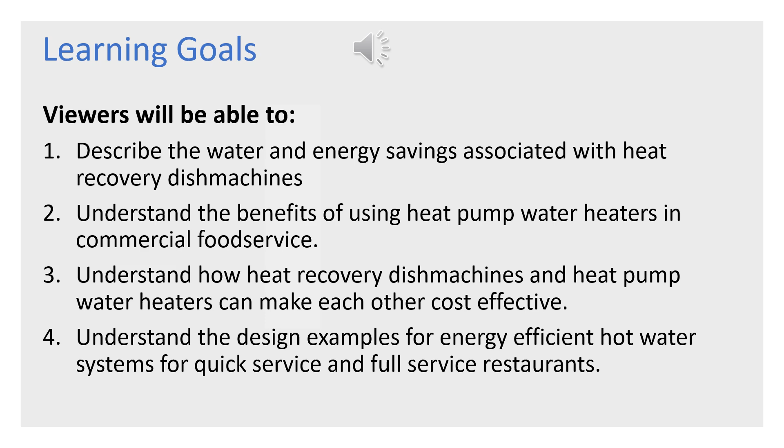By the end of this presentation, viewers will be able to describe the water and energy savings associated with heat recovery dish machines, understand the benefits of using heat pump water heaters in commercial food service, understand how heat recovery dish machines and heat pump water heaters can make each other cost effective, and understand the design examples for energy efficient hot water systems for quick service and full service restaurants.

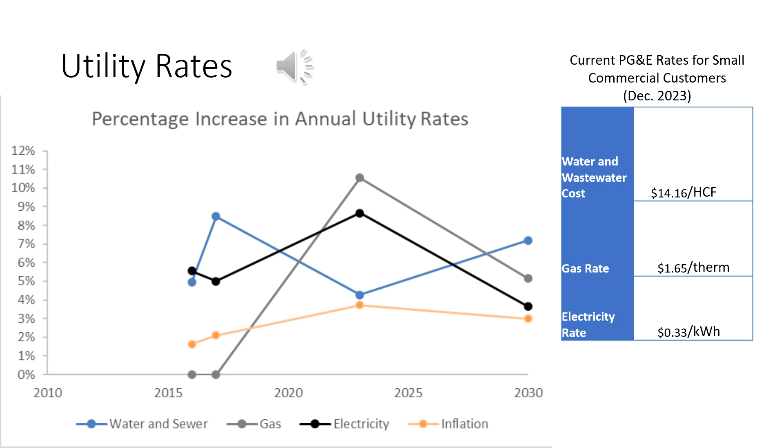Generally speaking, utility rates are rising and are rising a bit faster than inflation, and they're projected to continue rising a little bit faster than inflation throughout the rest of the decade. Electricity and gas rates have been going up as a general trend over the last 10 to 15 years, and electricity is set to actually outpace gas in terms of how much it's going to increase. This is going to make fuel switching from gas to electricity a little bit more difficult financially going forward, but later in this presentation we'll show that it still can be cost effective in some cases.

Hot water systems are divided into three main parts: hot water delivery and fixtures, distribution systems, and hot water generation. In section 1 of this presentation, we will discuss hot water delivery, points of use, and fixtures, including dish machines, pre-rinse spray valves, other pre-rinse operation equipment, hand sinks, and lavatory sinks.

Section 2 will cover distribution systems, which is the set of piping that connects water heaters to fixtures. This will include hot water piping, insulation, and recirculation systems and their control systems.

Section 3 will cover hot water generation, which will talk about different kinds of water heaters and their various efficiencies, and different schemes to increase the overall operating efficiency of these water heaters. Finally, Section 4 will cover design examples in a quick service and a full service restaurant that will bring all of this information together.

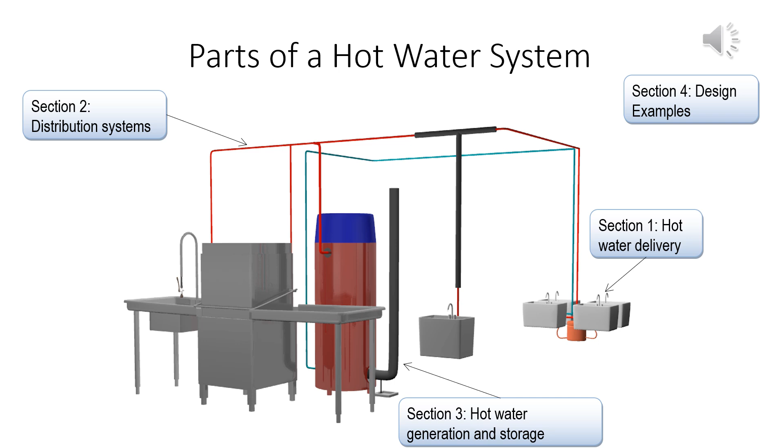This is largely due to differences in these systems. Quick service restaurants typically will have much smaller systems than full service restaurants, and full service restaurants will typically need to use larger and a larger number of dish machines than a quick service restaurant would. Full service restaurants typically rely more on in-person dining and reusable dishes rather than quick service restaurants, which can rely more on takeout, which is a large part of the reason that the water use between these two types of facilities are so different.

This has consequences for their overall energy use and their annual utility costs. The natural gas used for a quick service restaurant is about 1,600 therms per year, whereas a full service restaurant will use about 8,400 therms per year. It is assumed for these restaurants that they're using standard efficiency tank type natural gas fed water heaters, because these are the most common type of water heater found in the commercial food service industry at the time of this recording. A full service restaurant will also use about 74,000 kilowatt hours per year to feed its dish machine and its recirculation pump.

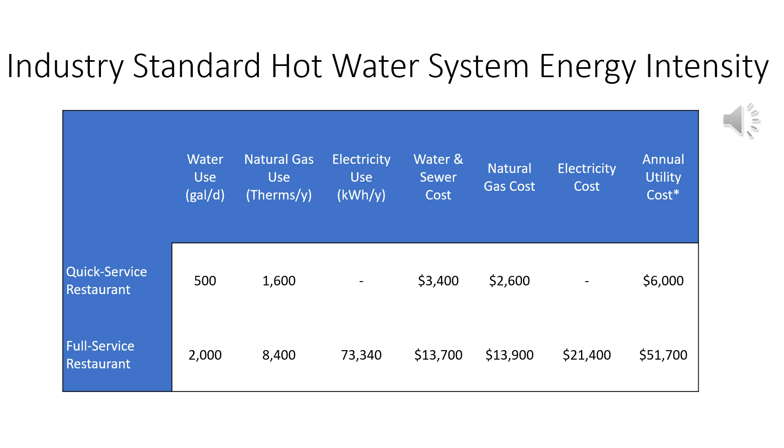The savings potential for hot water systems in quick service and full service restaurants is pretty substantial. A best-in-class quick service restaurant will use a high-efficiency gas-type water heater, as well as high-efficient fixtures such as a high-efficiency pre-rinse spray valve and low-flow aerators. A best-in-class full-service restaurant will use efficient fixtures and will use a heat recovery dish machine, which will lower the load on its upgraded efficiency water heater.

These changes lead to annual savings over conventional of about $1,600 per year for the quick service restaurant and about $11,000 a year for the full service restaurant. These savings are pretty substantial and can help to justify the cost of replacing equipment even in the middle of its service life.

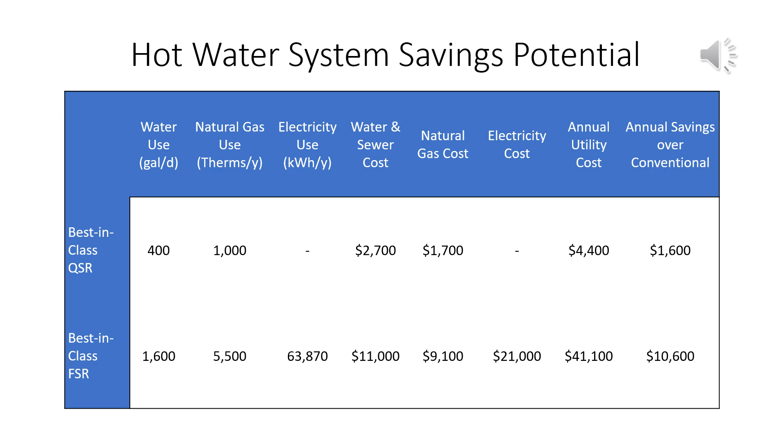The design path for savings will help designers engineer systems that can achieve the savings potentials listed on the previous slide. The first step is to specify efficient hot water equipment. This step will lower the total amount of hot water demand, which will have many design implications as designers move from the fixture all the way back to the water heater.

The next step is to build an efficient distribution system and to optimize the control of the recirculation loop. This will further reduce the energy demand on the water heater. Once these are achieved, the designer should specify a high-efficiency water heater. There are multiple examples of high-efficiency water heaters listed later in this presentation and in the design guide.

The last step is to commission and develop a maintenance and equipment replacement plan. Once the system is actually designed, it is imperative to commission the system as it is actually designed and then to maintain that system so that it operates as the designer intended it to. It is also important to have an equipment replacement plan so that the operator can make good decisions about what to do when pieces of equipment invariably burn out.

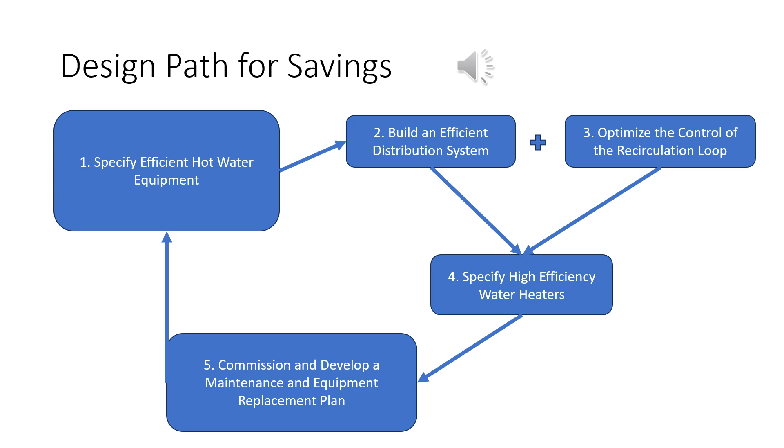Section 1. Fixtures and dish machines.

Specifying efficient fixtures is an important design step for many reasons. The first is that efficient fixtures limit the hot water demand, which reduces both water and energy consumption. The second, and most important from a design perspective, is that reducing hot water demand affects every other part of the system.

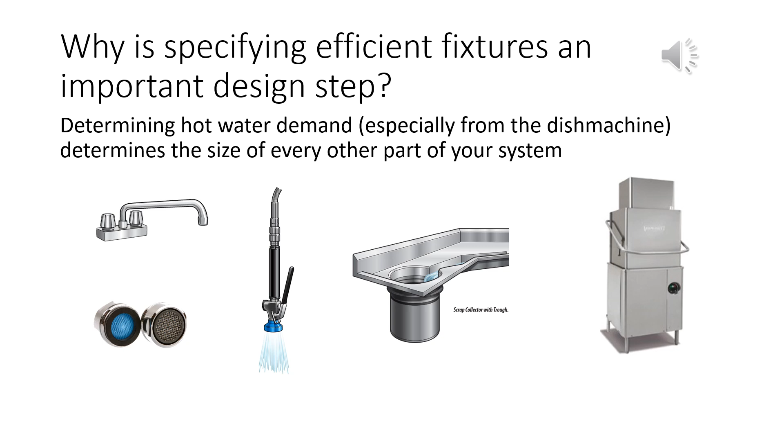Pipe diameters, both for branches and for the main recirculation loop, can be smaller if low water use fixtures are used. Hot water demand also plays a role in sizing the water heater. A system with efficient fixtures can have a smaller water heater, which can help reduce the first cost of the system.

Most of the hot water demand in a commercial kitchen comes from the dish room because this is where most of the critical sanitation tasks happen.

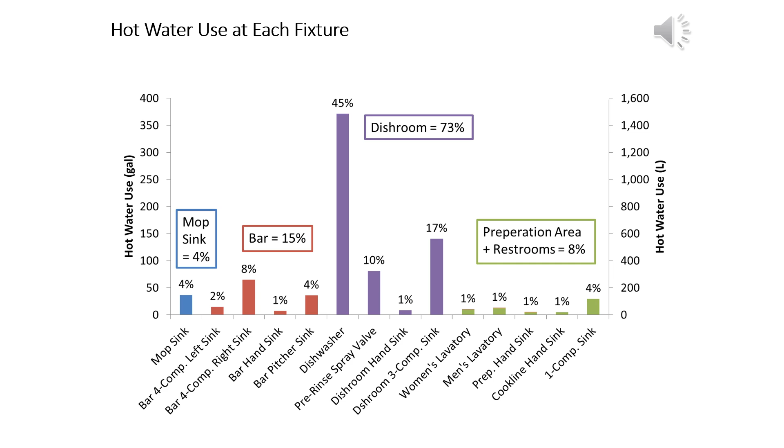The dish machine is typically the most hot water intensive fixture on a hot water system, so selecting an efficient dish machine is one of the most important tasks for hot water system design.

There are 4 main classes of dish machine commonly found in commercial food service facilities. Larger facilities typically require larger dish machines as they can wash larger volumes of dishes.

The smallest dish machine is an under-counter machine, typically found at bars and cafes. They are also found in front-of-house bars in larger full-service restaurants. Under-counter dish machines are by far the most common type of dish machine.

Upright door-type machines can wash between 45 and 60 racks of dishes per hour and are commonly the main sanitation workhorse of a full-service restaurant.

Rack conveyor dish machines use a conveyor to feed racks of dishes through the washing chamber and can wash up to 90 racks of dishes per hour. They are commonly found in very large full-service restaurants and cafeterias.

The largest class of dish machine is a flight-type machine, named for its use in airport commissaries. They use a conveyor with plastic fingers to feed dishes through the washing cavity and are commonly found in large institutional facilities such as university and prison cafeterias.

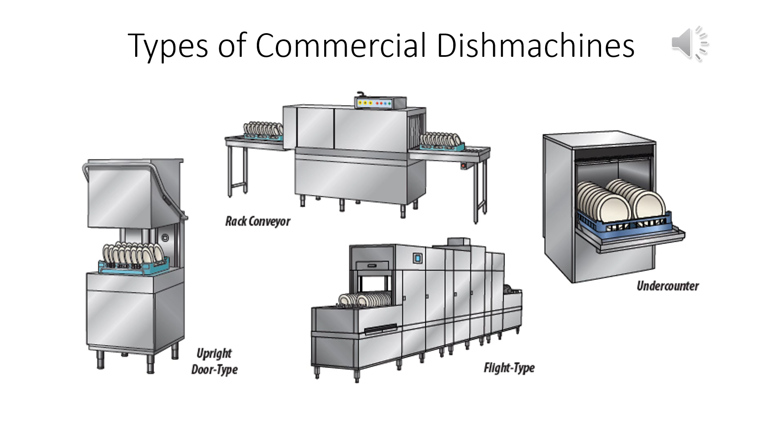To size a dish machine, a designer needs to know the estimated dish throughput of the facility. A common design misstep is using an oversized dish machine for the actual load. This can cause lower system efficiency and water and energy waste.

Under-counter dish machines typically have water uses rated between 0.6 and 0.8 gallons per rack of dishes washed. In the field, they're typically found to consume between 0.7 and 2.5 gallons per rack. This is a common feature among dish machines, that they'll use more water in the field than the manufacturer's rating.

This is usually due to maintenance concerns, as most dish machines tend to use more water as they age in the field over time. Door types are usually rated between 0.6 gallons per rack and 1.0 gallons per rack. In the field, they're usually found to consume between 0.75 gallons per rack and 1.4 gallons per rack.

It also compares the manufacturer's rating to the real world as-measured energy and water usage for rack conveyor and flight type conveyor dish machines. These machines typically use much more water than their door type or under counter counterparts.

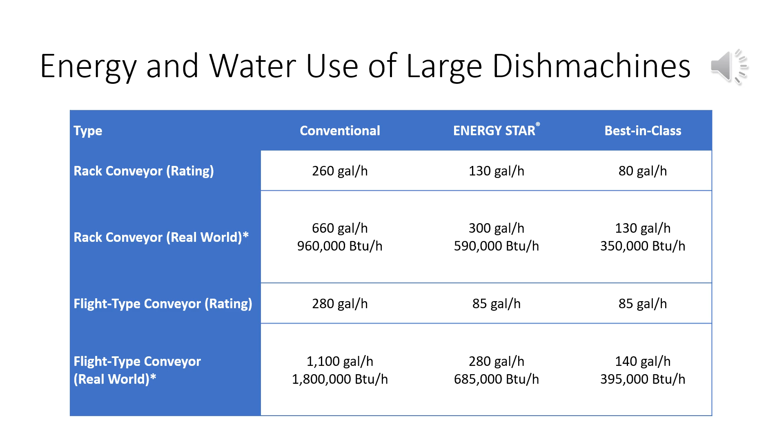One of the most important emerging technologies for efficient dish room design is the exhaust heat recovery dish machine. These machines use a heat exchanger to capture the heat generated by the dishwashing process, which is normally lost when the waste steam goes through the exhaust hood.

The energy from this steam preheats incoming cold water. The preheated water is then sent through a booster heater to reach its final rinse temperature. Door type and under counter heat recovery dish machines can preheat incoming cold water to between 110 and 130 degrees before reaching the booster heater.

They have been shown to use the same amount of electricity as their conventional high-temperature dish machine counterparts in the field. However, heat recovery dish machines consume far less hot water. Some don't even have a hot water connection.

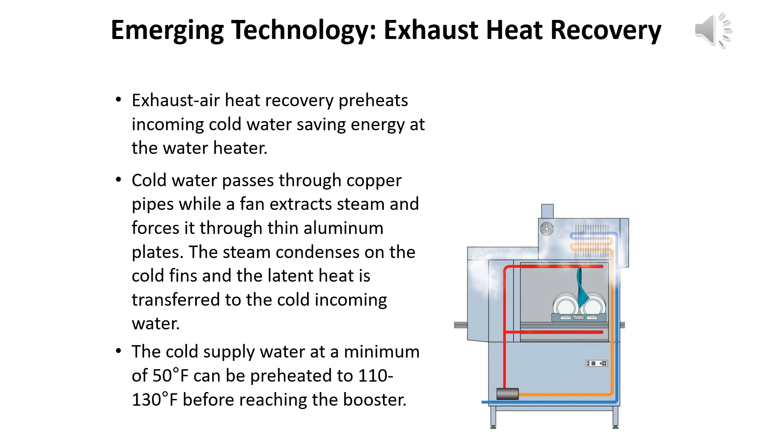They therefore present sizable hot water and energy savings at the water heater. They have also been shown to project less heat to the dish room space, saving air conditioning money and contributing to a more thermally comfortable working environment. They also require less or no ventilation, saving energy at the exhaust fan. This is an important point for HVAC designers because in some cases, dish rooms can be designed without an exhaust fan altogether when using an exhaust heat recovery ventless dish machine.

The baseline machine used about $23,000 per year between its water and electricity costs and the gas consumption of the water heater. The exhaust air heat recovery machine saved about $7,000 per year even though it washed the same number of dishes per day. The heat recovery machine used roughly the same electricity as the baseline machine, so its savings were attributable to its much lower water usage and the fact that it didn't consume gas because it didn't have a hot water connection.

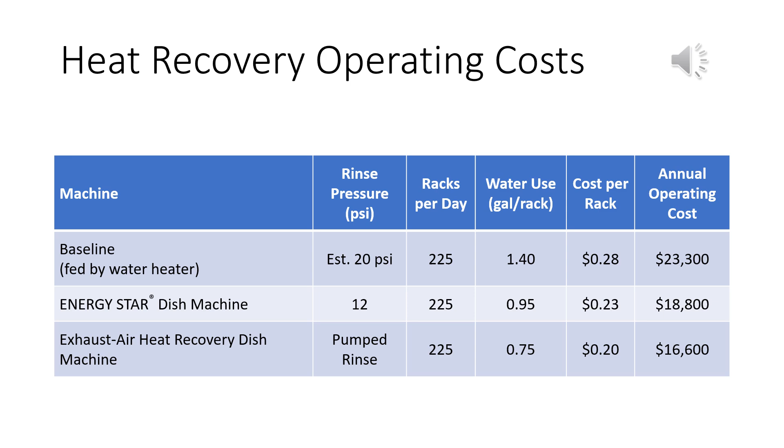Many manufacturers produce an exhaust air heat recovery dish machine and sell them in the US. Many manufacturers also make cold water feed only machines available in door-type and under-counter models.

If the hot water demand is smaller through the use of efficient fixtures and heat recovery dish machines, pipe diameters can also be smaller. This helps save energy everywhere in the distribution system because there is less pipe surface area for heat loss. It also improves overall hot water delivery performance.

3/8 inch piping would allow for lower wait times for hand sinks, but due to outdated sizing guidelines that don't take half GPM hand sinks into account, this is not currently allowed. The common practice is to feed hand sinks with 3/4 inch diameter piping, but this means branches to hand sinks need to be less than 2 feet long to preserve 10-second wait times.

Now that the hot water load has been minimized by selecting efficient fixtures, a more efficient distribution system can be designed. Section 2: Distribution Systems.

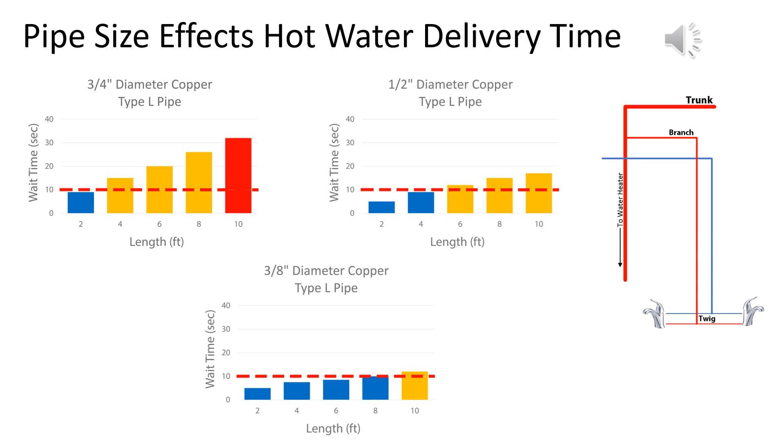The distribution system design best practices listed here are all designed to reduce the total amount of hot water distribution system piping. This will reduce energy waste through the distribution system. Mirroring men's and women's restrooms is an obvious place to start because it will reduce the number of branches coming off of the main recirculation loop. Locating the dish room on a wall opposite the front of house and placing any auxiliary bar fixtures or restrooms on the other side of the dish room wall is another way to reduce the total amount of piping.

Centrally locating the utility room and locating it near major points of use is a good rule of thumb. Locating all of the fixtures close to each other will reduce the number of branches that you need to have off of the main recirculation loop.

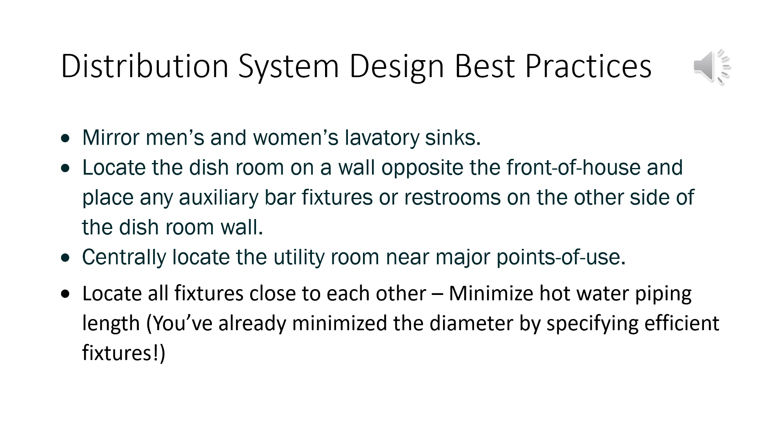There are two types of conventional distribution systems commonly found in commercial food service facilities. The first is the simple distribution system, which connects a main hot water trunk to the water heater, then branches off to each fixture. The main benefit of this system is that it's easy to design and install, but the main drawback is that there are usually significant delivery problems, especially long wait times at hand sinks.

California building codes state that if there are fixtures located more than 60 feet away from the mechanical room, simple distribution systems are not allowed. They are therefore usually found in quick service and very small full-service restaurants.

One common configuration is to run two distribution lines: a 140-degree sanitation line and a 100 to 120-degree hand sink line. This greatly increases energy waste because of all the extra piping.

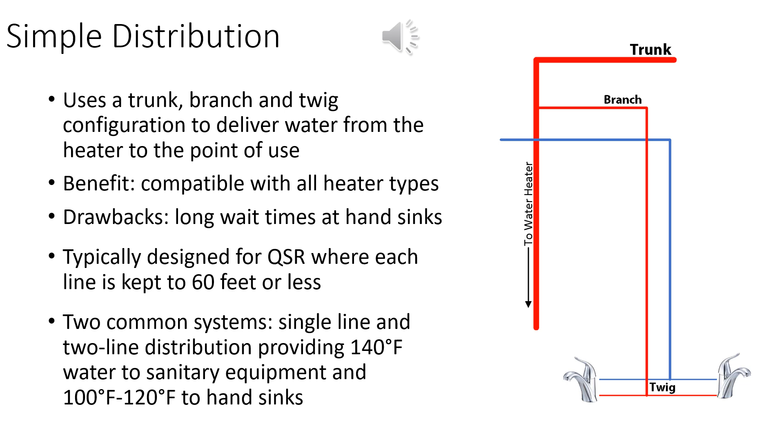The other type of conventional distribution is a continuous recirculation system, which uses a pump to keep a recirculation loop near the water heater's set point temperature. This improves hot water delivery because instead of having to draw water through the whole system, each fixture only has to clear the water in its branch before it sees hot water.

This method does not always ensure that hot water makes it to the faucet. Hand sinks still have delivery problems with continuous recirculation systems. High operating costs are incurred in a typical full-service restaurant because hot sanitation water circulates all the time, constantly losing heat to the surroundings.

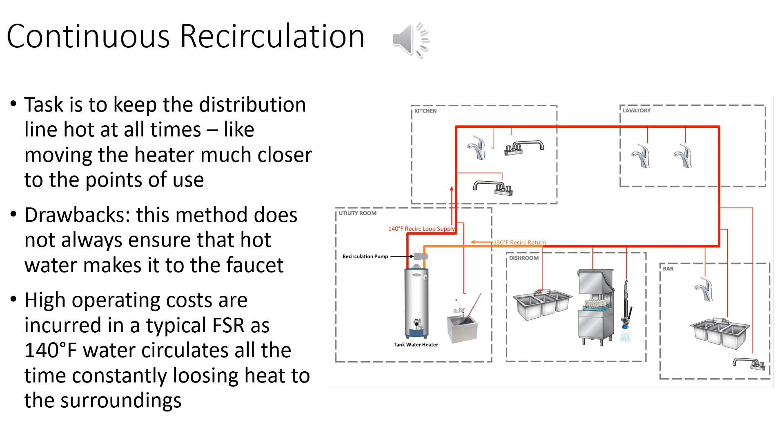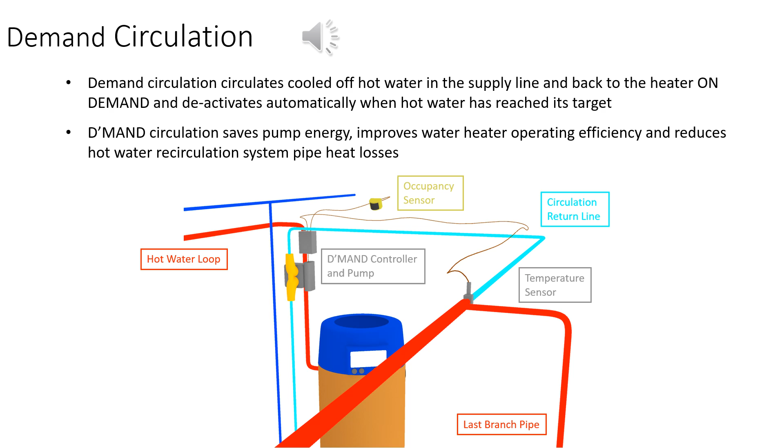One method for reducing the energy waste from continuous recirculation systems is to install a demand circulation controller. These controllers use occupancy sensors, temperature sensors, and timers to ensure that the recirculation pump only runs when hot water is needed. They can reduce the pump runtime from 24 hours per day to less than 2. This reduces recirculation system pipe heat losses, saves pump energy, and improves water heater operating efficiency. It is especially effective for systems that use a condensing water heater because they can help preserve tank temperature stratification.

An emerging distribution strategy is distributed generation. These systems use a main recirculation loop to feed the fixtures close to the mechanical room and use small point-of-use heaters to feed hot water to fixtures that are far away. These point-of-use fixtures are usually electric so that they don't need to be vented. This greatly reduces the amount of hot water piping.

In the example shown on this slide, a heat recovery dish machine is also used, which means that the main recirculation loop can run at a lower temperature than 140 degrees, thus saving additional energy on the main loop.

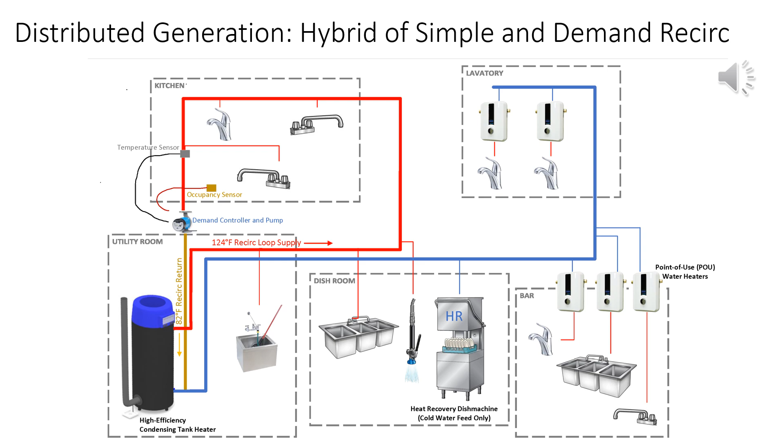Pipe insulation is an obvious and easy energy-saving technology for hot water systems. Designers should specify insulation on all hot water supply, return, and branch lines to make sure that the minimum amount of energy is lost from the piping system to the ambient surroundings.

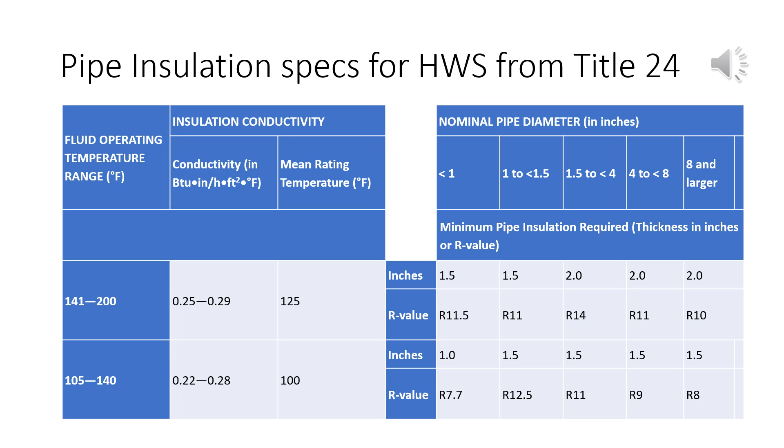In addition to being a very effective energy-saving technology, pipe insulation is actually called out for hot water systems in California's Title 24. This table shows the insulation conductivity and the minimum pipe insulation required per nominal pipe diameter for different temperatures of fluids.

Pipe insulation is commonly specified for hot water systems, but in practice, it is often poorly installed if it is installed at all. Pipe insulation should be installed on the cold water pipe leading to the expansion tank, as well as on all of the other hot water piping.

Pipe supports should be installed on the outsides of pipes because if installed on the pipe's surface, they can act as thermal bridges or fins which can rapidly bleed heat to their surroundings. Tees and turns are also commonly uninsulated, but can be easily insulated according to the schematic at the bottom left of this slide, which shows how to create a notched tee and a mitered elbow.

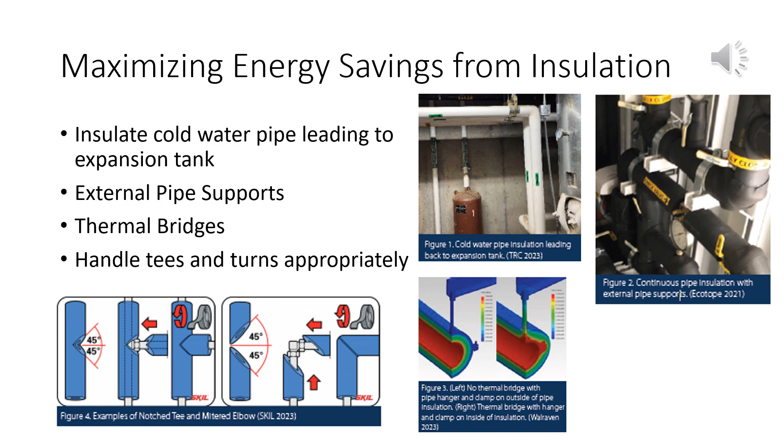Master mixing valves can increase the effective hot water storage capacity because they allow for the water heater to operate at temperatures much higher than the desired system set point. The MMV tempers this overheated water with cold water to produce the desired set point temperature in the supply loop. This is very important for water heater sizing, especially for heat pump water heaters, which typically have slow recovery rates and depend on storage volume to provide adequate performance.

Running the water heater at a higher temperature can improve tank stratification when used with a master mixing valve. Instead of allowing 100% of the recirculating water to return to the tank, the master mixing valve only allows 10 to 30% of the water to return to the water heater. The balance is made up with cold water. So, the MMV allows for higher temperatures at the top of the tank and lower temperatures at the bottom of the tank, thus improving stratification.

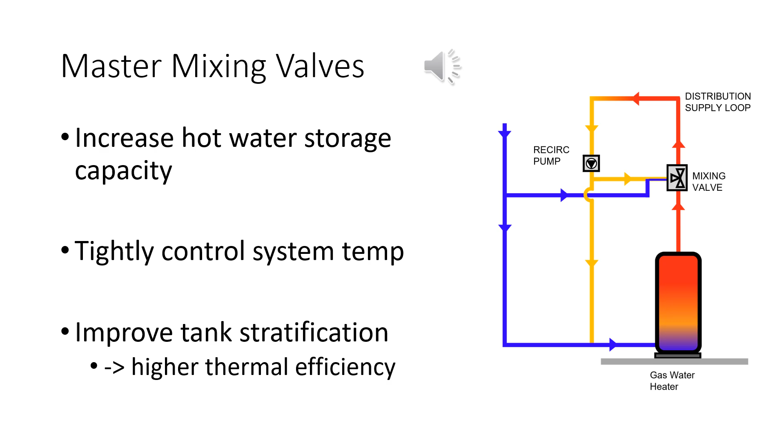Master mixing valves can also tightly control the distribution system temperature. Modern MMVs have digital controllers in dead bands around 3 degrees Fahrenheit.

Recirculation pumps are a significant electrical load on the water heating system. They are typically oversized, which means both that there's typically too high of a flow rate of water running through the recirculation pump, and that there's too much energy being consumed by the pump itself.

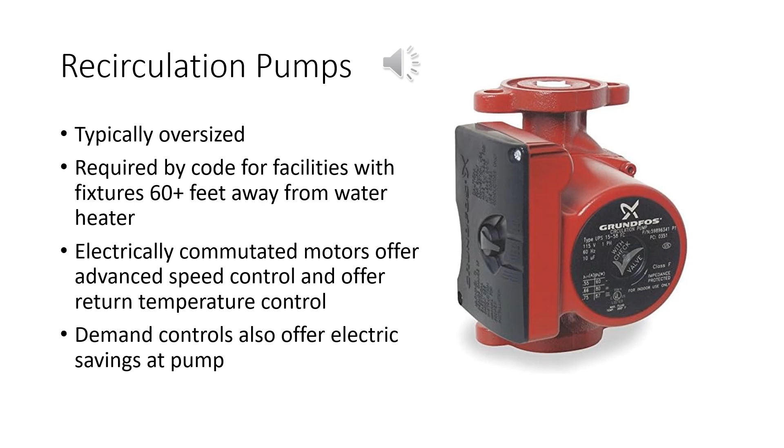Electrically commutated motors offer advanced speed control and return temperature control, which allows for less electrical energy to be consumed. Demand controls offer electric savings at the pump, basically by turning the pump off when it doesn't need to be run.

ECM pumps are more efficient and use less electricity than conventional recirculation pumps. They can run at variable speeds, which means they are more controllable. ECM pumps are also more expensive at first cost, but don't break down as often as recirculation pumps.

Overall, they can be less expensive to operate over time because they use less electricity and don't need to be replaced as often.

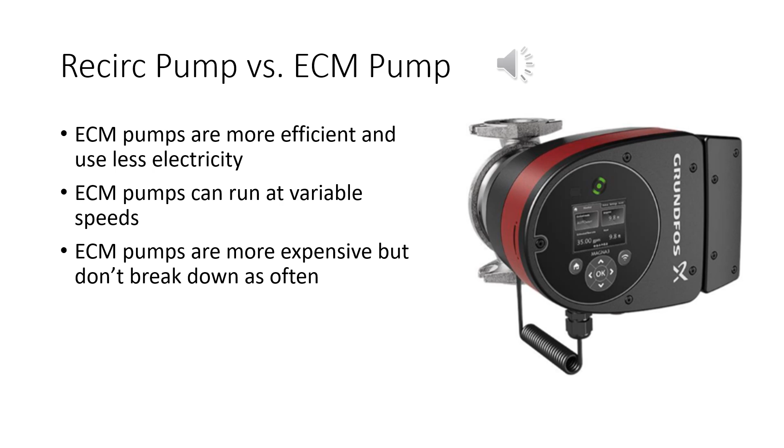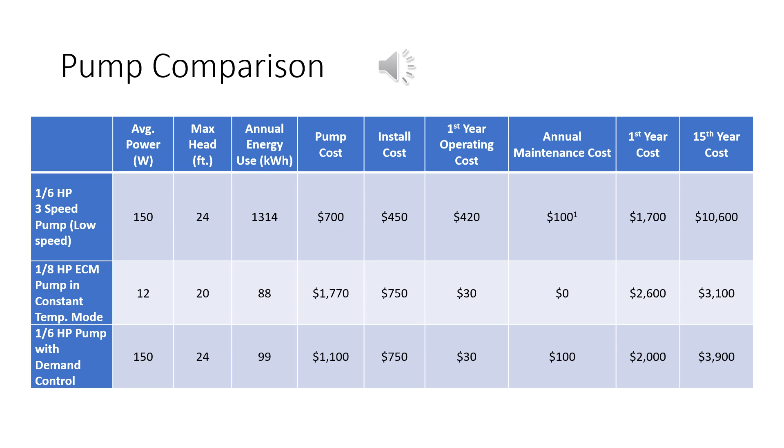In the annual maintenance cost column, it is assumed that the conventional pump uses $100 in maintenance costs per year. All of this leads to the last column, the 15-year cost, being $10,000 for the uncontrolled conventional pump, $3,000 for the ECM pump controlled by a constant temperature controller, and $3,900 for the conventional pump controlled with a demand controller. The clear winner is the ECM pump in constant temperature mode because it is less costly to run over time than the conventional pump, even when controlled with a demand controller.

Section 3. Water heaters.

The first step in selecting a water heater for a commercial food service facility, once the rest of the system is designed, is to select the kind of water heater that is desired.

The most common water heater type is the standard efficiency natural gas fed storage water heater. The pros are that these heaters are very simple, robust, low cost, easy to specify, easy to fix, easy to replace, and relatively cheap, with an upfront cost of between $2,000 and $9,000 depending on the size of the heater and how much storage it has.

The cons are that it only has an 80% thermal efficiency. They can have significant standby losses. They can run out of hot water, especially if undersized, and they have a short lifespan in commercial kitchen environments, around 5 years.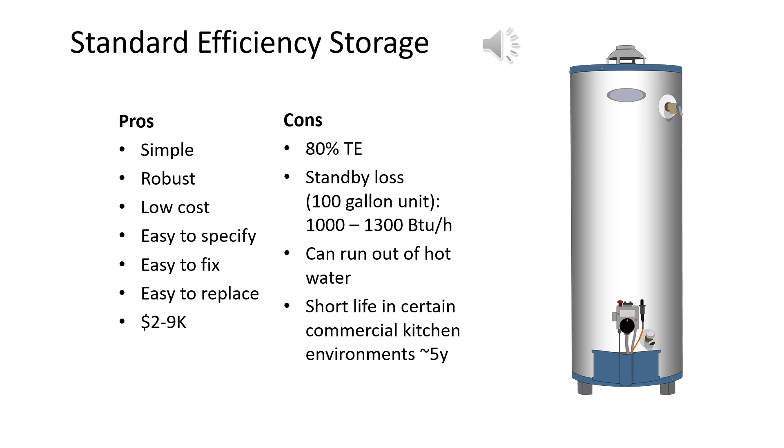Condensing water heaters are more efficient than standard storage water heaters. They work by running extra lengths of exhaust through the water tank. This cools the exhaust and allows the water in the combustion exhaust to condense, which provides more heat to the water in the tank. The pros are that these heaters boast 95% efficiency.

They can have a much smaller standby loss because they're usually insulated. There's potentially a lower cost of install because sometimes these heaters can be installed with PVC exhaust instead of standard ducting. And these pair very well with master mixing valves and demand recirculation controllers, because their condensing function requires tank stratification to work.

The cons are that these are more complex, which means they're harder to work on. When installing these water heaters, you have to manage the condensate. The condensate produced is usually fairly acidic, so there needs to be some kind of buffer installed on the condensate drain, or a condensate drain installed in the floor to handle that.

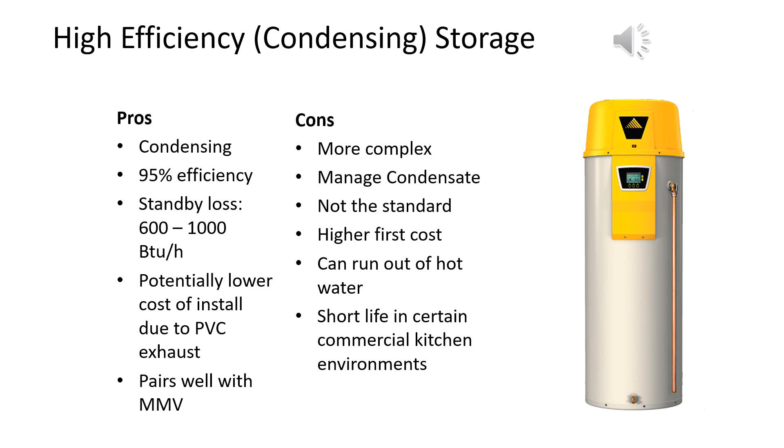These are not the standard, so fewer plumbers can work on them. They have a higher first cost, so when they run out of water, they cost more to replace. And like other water heaters, they have a relatively short lifespan in certain commercial kitchen environments, especially ones where they run out of water often.

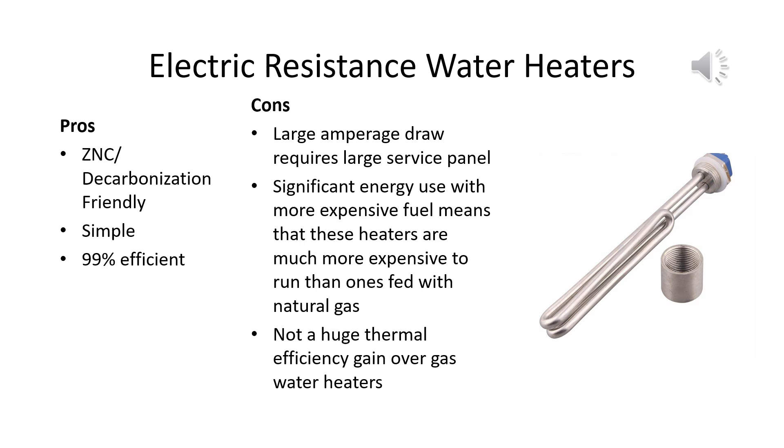If California continues to decarbonize, heat pump water heaters are likely to become the most common type of water heater in commercial food service facilities. Heat pump water heaters boast a coefficient of performance as opposed to a thermal efficiency. They siphon energy from the air in their surroundings to heat water. An electric heat pump water heater with a COP of 2.5 would produce 2.5 kilowatt hours of useful water heating for every kilowatt hour consumed at the wall. This would provide very large energy savings over conventional gas water heaters and could, in some cases, be enough to offset the higher fuel cost.

Heat pump water heaters can be packaged or split, which refers to whether the evaporator is connected to the hot water tank or remote. If the evaporator is placed in a hot room in the facility, the heat pump can provide some free cooling as an added benefit.

The cons are that these units require large volumes of hot water storage to compensate for their slower recovery, which means that they require a larger footprint. Heat pump water heaters also require ventilation and have about two to eight times the upfront cost of traditional water heaters, so there are significant barriers to their widespread adoption in the commercial food service industry without some level of incentivization.

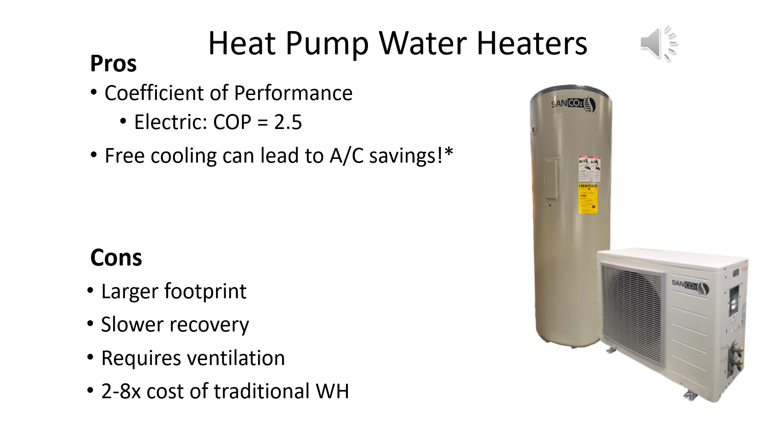Electric heat pump water heaters are essentially a refrigerator. Energy is siphoned from the ambient space by use of an evaporator, which heats up a refrigerant fluid. This fluid then goes through a compressor and a condenser. The heat is deposited via the condenser into the hot water, and then the refrigerant is passed through an expansion valve towards the evaporator. The size of the compressor determines the maximum rate of hot water generation.

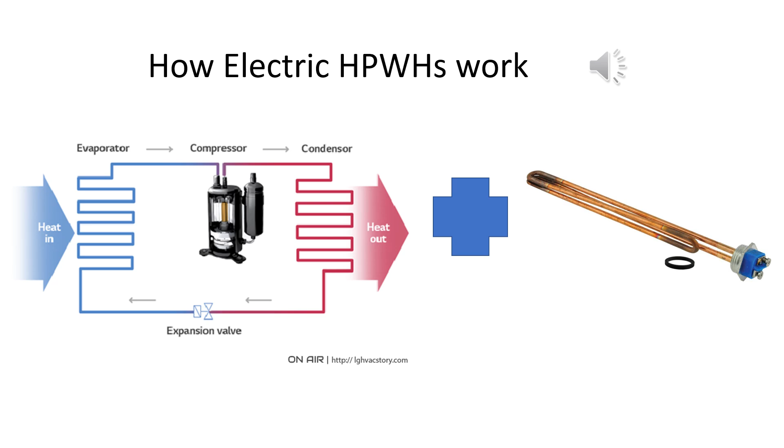Many electric heat pump water heaters have an auxiliary electric resistance heater, which essentially acts as a backup in case the heat pump can't deliver enough hot water to meet the load.

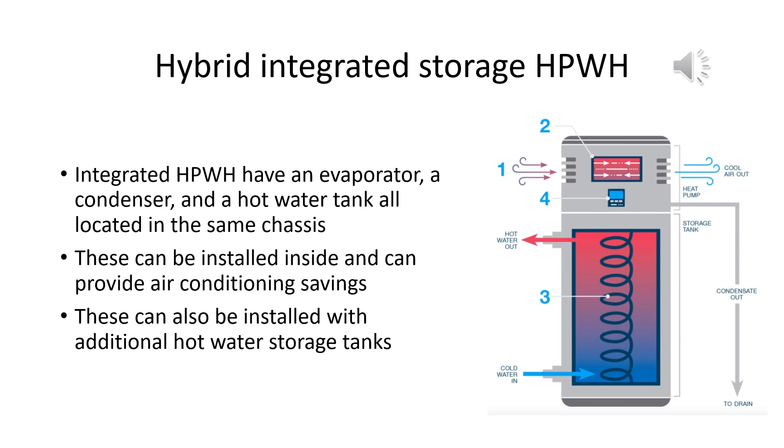Hybrid integrated storage water heaters have an evaporator, a condenser, an electric backup heater, and a hot water tank all located in the same chassis. They can be installed inside, which can provide air conditioning savings. They can also be installed with additional hot water storage tanks to increase their capacities.

Heat pump water heaters have a limited recovery rate compared to a conventional water heater. This requires a sizing adjustment when specifying heat pump water heaters to ensure that the highest hot water demand during the day can be handled without depleting the tanks. The larger storage volume also ensures higher operating efficiencies by minimizing heating cycles and the ability to heat a larger volume of lower temperature water depending on the location of the temperature sensor and set point.

Split systems are generally more efficient with operating COPs ranging from 2 to 4. They can take advantage of single-pass heating, where cold water just goes through the heater one time, which preserves efficiency. Some package systems use multi-pass heating, where the water is passed through the heater multiple times before reaching its set point.

Some systems are designed with swing tanks, which act as auxiliary hot water storage but can provide some additional heat for temperature maintenance. They can help protect the heat pump water heater from having to handle recirculation losses, which can preserve its COP.

One new technology is a heat pump assist, where a conventional gas-fired water heater is installed downstream from the heat pump. The heat pump then acts as a sort of water preheater, thus reducing the overall gas load.

The benefit of this system is that instead of using an electric heater for backup heat, gas is used. This system would be more robust to demand surge pricing because it could rely on gas during peak demand periods, but could also take advantage of the heat pump's COP.

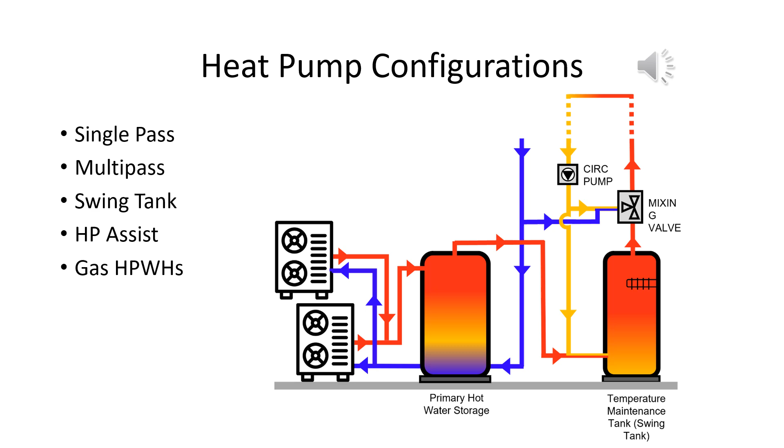Finally, there are gas-fed heat pump water heaters on the market. These typically have COPs around 1.5. Generally, they are very expensive in first costs, and because of their relatively low energy savings, they offer very long payback times.

Sizing a heat pump water heater is fairly nuanced. If the heat pump water heater is too small, it will provide limited energy savings and will rely mostly on its backup heater. If it's too large, it will never realize the full COP because it will be short cycling. The cost of a heat pump water heater scales with its size, so reducing hot water demand will decrease first cost by reducing the needed size of the heat pump water heater.

Sizing a heat pump water heater to meet 30 to 60% of the peak load may be optimal for most full-service restaurants, but this comes with the caveat that enough storage needs to be installed at the site to handle those larger loads.

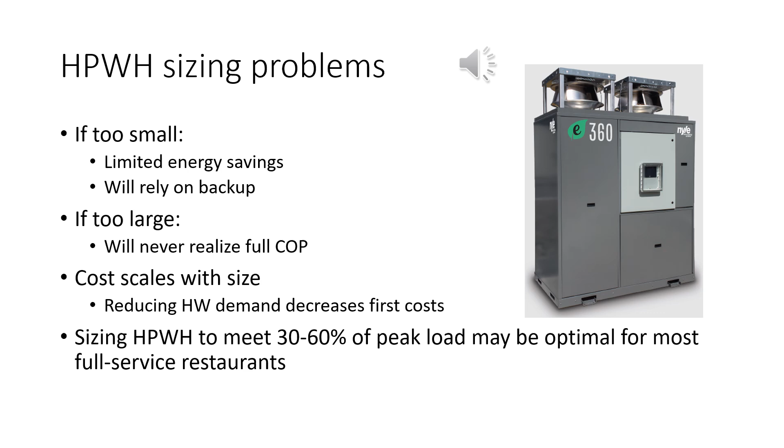There are a few design constraints for heat pump water heaters. One concern raised is the noise from running the compressor. Heat pumps usually run about 60 decibels. For reference, the noise level of ambient conversation in a restaurant is rated around 70 decibels. Vibration is also an issue, and space is an issue.

Heat pump water heaters require large storage tanks. Both of these issues can be skirted by installing the heat pump and its storage tanks outside or on a rooftop. For heat pumps that need to be placed inside, small enclosed spaces are usually not suitable.

The heat pump works by removing heat from the ambient air, so if the volume of air is limited, the temperature of the air will drop. If it drops too low, there won't be a heat source for the heat pump to draw from, and its COP will be compromised. This is also a concern for installing heat pumps outdoors in colder climates.

Heat pumps that are installed inside restaurants also need to have frequent air filter changeouts to account for grease-laden air.

Of particular concern for retrofits is that heat pumps require substantial electricity, which can require a panel or utility service upgrade in some cases. Many restaurants have limited available electrical capacity, so this is of particular concern to the commercial food service industry. The largest issue with heat pump water heaters is that the health department currently forces restaurants to

size heat pumps by their input capacities as opposed to their output capacities. Traditional sizing guidelines effectively don't allow heat pumps to take advantage of their coefficients of performance, which leads to heat pumps being oversized by as much as a factor of 4. This is untenable for most food service operators because of first costs.

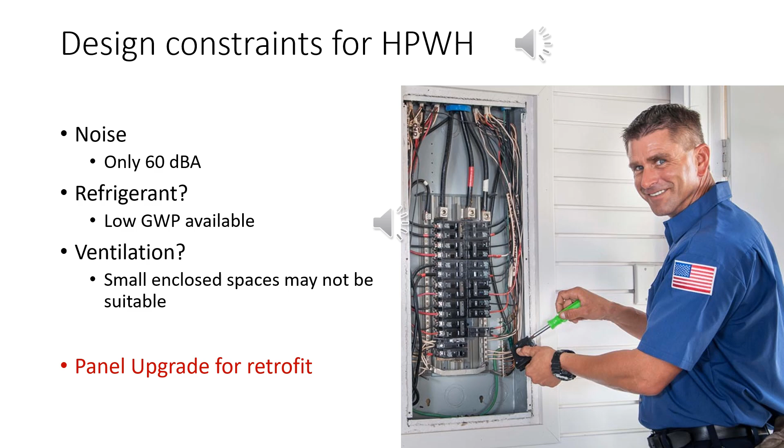Water heaters are traditionally sized by adding up the flow rates or effective first hour ratings from each fixture on a hot water system, then finding the water heater's required minimum energy input rate to feed these fixtures.

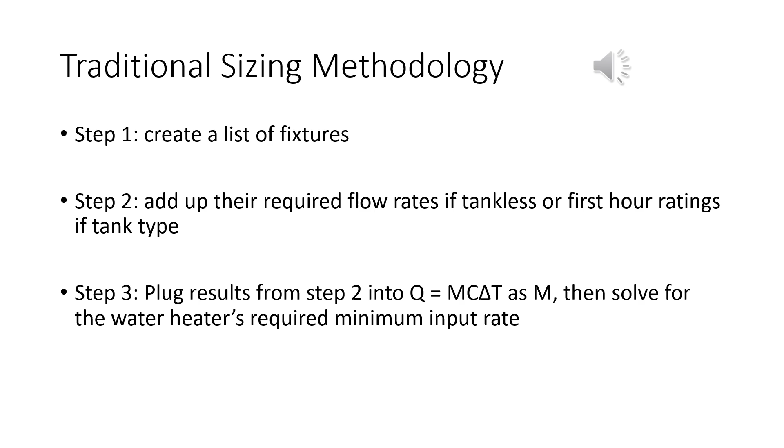The recovery rating is a measure of how fast the water heater needs to be able to recover hot water after depleting its tank. The recovery rating is calculated based on the fixtures installed on the hot water system. A sample calculation is provided on the next slide.

The second formula is for sizing electric water heaters and is essentially the same as the first formula except multiplied by a conversion factor to convert BTU per hour to kilowatts.

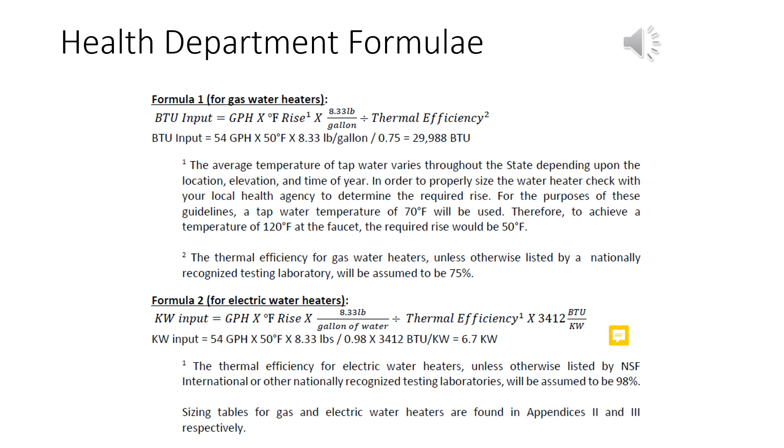This formula would need to change for heat pump water heaters to be accepted by the health department. Ultimately, the left side of the equation would need to read kW output as opposed to kW input, and the thermal efficiency would need to be changed to thermal efficiency or coefficient of performance.

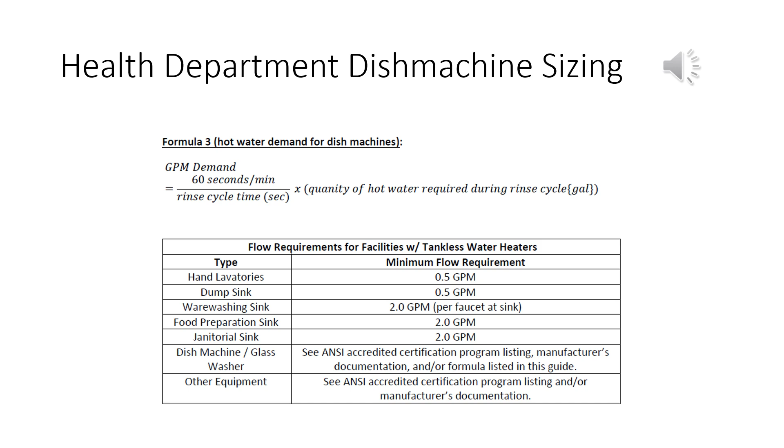It compares heat pump water heaters sized using 98% thermal efficiency to heat pump water heaters with an assumed 2.5 COP. This is done because currently health departments don't allow heat pumps to be sized according to their COPs, so this allows us to compare current accepted sizing guidelines to a more realistic engineered approach.

Of particular note is that the minimum energy input rate required from the heat pump sized per health department guidelines is identical to the input rate required for a conventional electric resistance water heater. The sizing guidelines effectively force the designer to size a heat pump water heater by its resistance backup heater as opposed to its heat pump component.

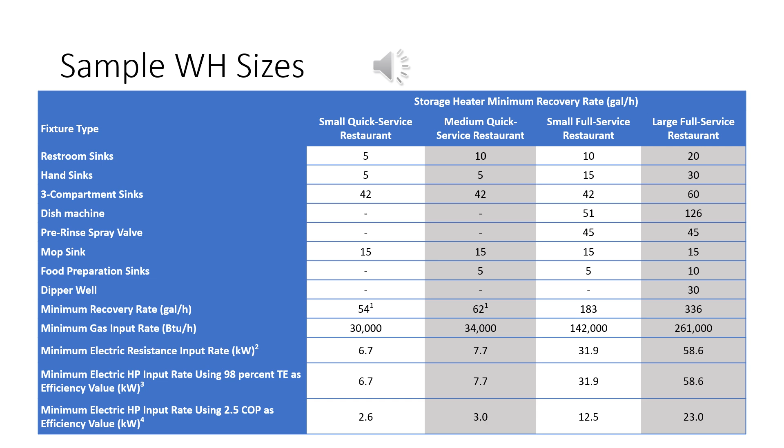This forces heat pump water heaters to be oversized by a factor of 3 or 4, which means that the heat pumps would almost always be short cycling, which would never allow operation at the heat pump's designed COP.

Another issue with the traditional sizing method is that it effectively sizes tankless water heaters on the assumption that every fixture will be running at full flow rate at the same time.

Tank-type heaters are effectively sized on the assumption that the hot water storage is depleted in the first hour, and then in the second hour, the restaurant is hit with another peak of 100% draw. Data from field monitoring studies shows that this virtually never happens in practice, and a real maximum second hour peak is about 30% of the first hour peak.

This also fails to take into account that most of a facility's large draws, such as the dish machine fill or facility washdown, happen outside of service periods and usually only happen once per day.

Traditional sizing leads to oversized water heaters and oversized distribution systems. Not only does this cause energy waste throughout the distribution system, but it decreases the operating efficiency of all types of water heaters. Traditional sizing also fails to account for the role of hot water storage capacity.

A slow recovery rate can be compensated for with large storage, especially in commercial food service. Restaurants typically have 1 to 2 periods throughout the day when a large volume of hot water is used, but they have many periods throughout the day when hot water isn't needed at all, such as between meal rushes and overnight.

If a restaurant had adequate storage and a water heater that could keep up with the total daily load as opposed to the maximum 1 hour load or the maximum instantaneous load, the facility's hot water needs could be met with a much smaller water heater.

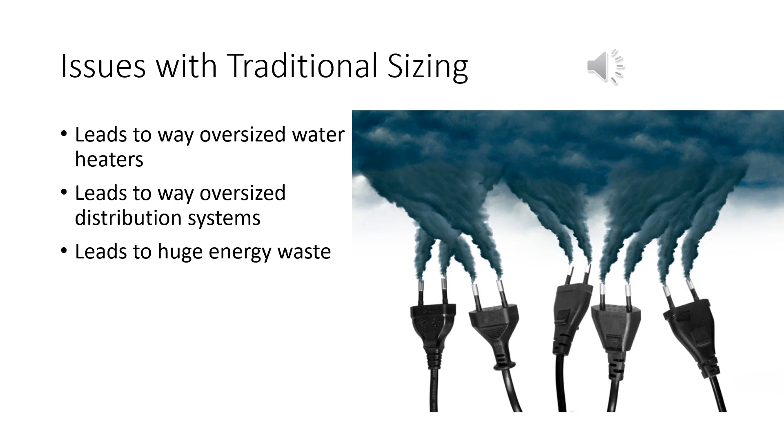One of the benefits of right-sizing a heat pump water heater is that a less expensive water heater can be selected. The cost of the heat pump scales with its size, so simply sizing a heat pump on its heat output can dramatically reduce the upfront cost of the heat pump water heater.

This also means that the water heater would have a smaller electric input rate, which would lower the probability that a panel or service entrance upgrade would be required in a retrofit situation. A smaller heat pump would also have an easier time achieving its designed coefficient of performance.

The ideal operating scenario for a heat pump water heater would be to essentially run 24/7, so a somewhat undersized heat pump with a small backup or swing tank in conjunction with a large primary storage tank is likely the most efficient configuration for most restaurants.

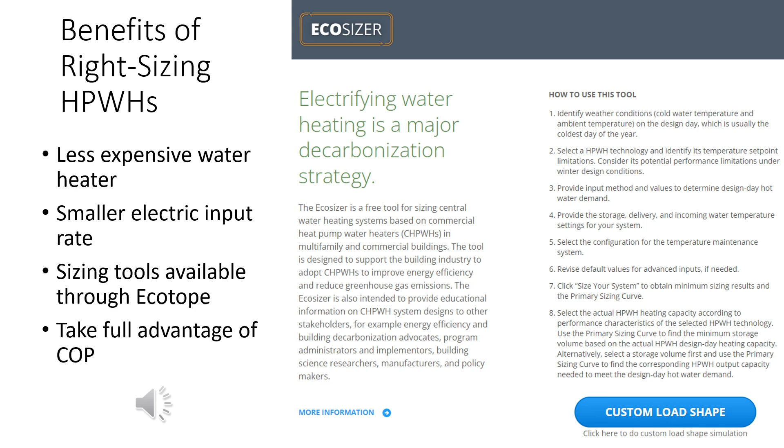Sizing tools for heat pump water heaters are available through Ecotope, an energy consultant based in Washington State. The calculator is set up for the residential sector, but a tool like this should be developed for the commercial food service industry.

A heat pump assist configuration could be a good medium-term solution which would allay health department concerns about heat pump water heaters, while still allowing restaurants to see the benefits of a heat pump water heater. Heat pump assist uses the heat pump for primary water heating, but uses a natural gas water heater in place of a swing tank.

The natural gas water heater can be sized to feed the hot water system on its own. Storage capacity is preserved with a large storage tank and a master mixing valve. A benefit of this system is that it has a lower total amperage than an electric resistance backup, and could be used to shave peaks during demand surge pricing times.

This kind of system has not yet been installed in a commercial food service facility, but there is current work being done to show this concept.

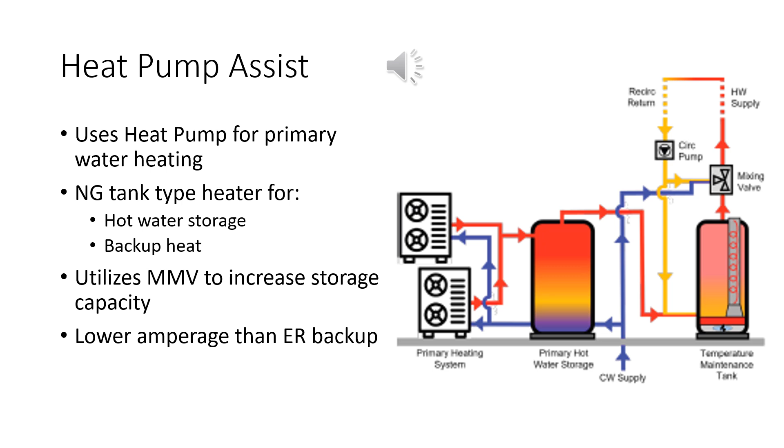This table compares the energy use and operating costs of different kinds of water heaters in a full-service restaurant context. The daily operating efficiency takes idle losses into account from each heater. The gas heater has an effective daily operating efficiency of 70%, and even the most efficient single-pass electric heat pump only has a COP of 4.3.

The most energy-intensive water heater is the conventional efficiency gas heater. The high-efficiency gas and low-efficiency electric heaters use almost the same amount of energy, and the heat pump uses the smallest amount of energy. The most cost-effective water heater is the heat pump in terms of operating costs, but this table also shows that a very efficient heat pump has a lower operating cost than the conventional gas water heater.

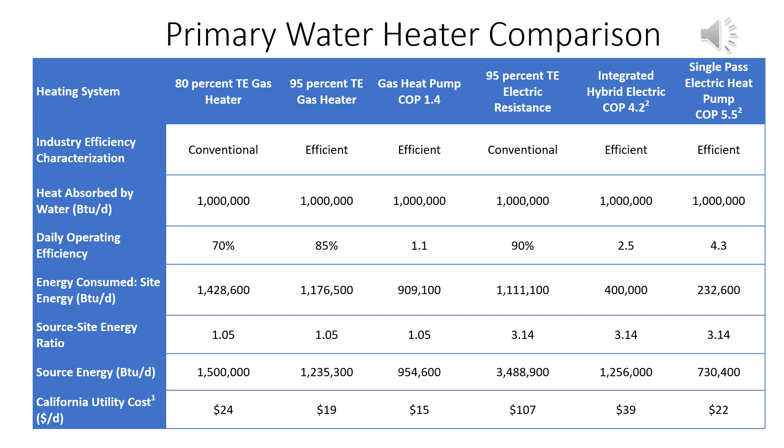This table also highlights the problem with conventional electric resistance heaters. They use less energy than conventional efficiency gas water heaters, but they can be between 4 and 5 times as expensive to operate. This cost difference is the main motivation to use heat pumps as the decarbonizing technology for hot water systems.

Section 4. Design Examples.

The first design example is for a quick service restaurant. This fictitious restaurant uses 350 gallons of hot water per day and requires 54 gallons per hour of recovery. It doesn't have a dish machine because it relies mostly on takeout, and the water heater is installed in the back room.

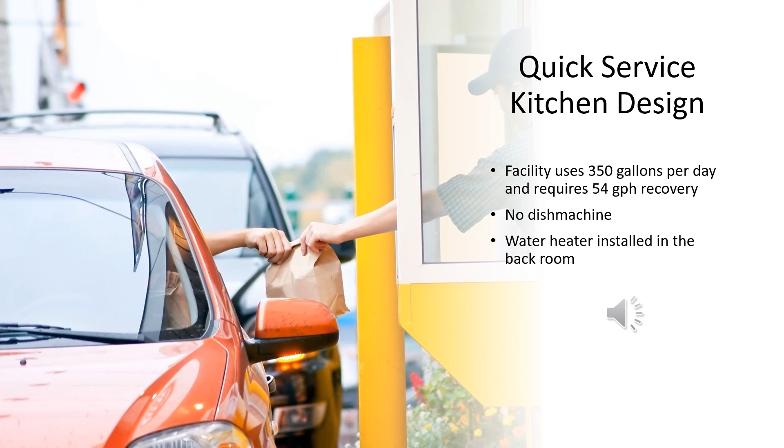The only difference in the design example for the quick service restaurant is the water heater, because the fixtures and hot water consumption are left constant. The first water heater in this example is the standard gas-fired water heater with 80% thermal efficiency. Its operating efficiency is 68%, which takes both tank idle losses and distribution losses into account. It is the most energy-intensive option, with almost 100,000 kBTUs of energy per year.

The second water heater is a condensing water heater. It has an operating efficiency of 84% due to its condensing function and uses around 80,000 kBTUs of energy per year. This shows that there are substantial energy savings for quick service restaurants just from retrofitting the water heater to a condensing water heater.

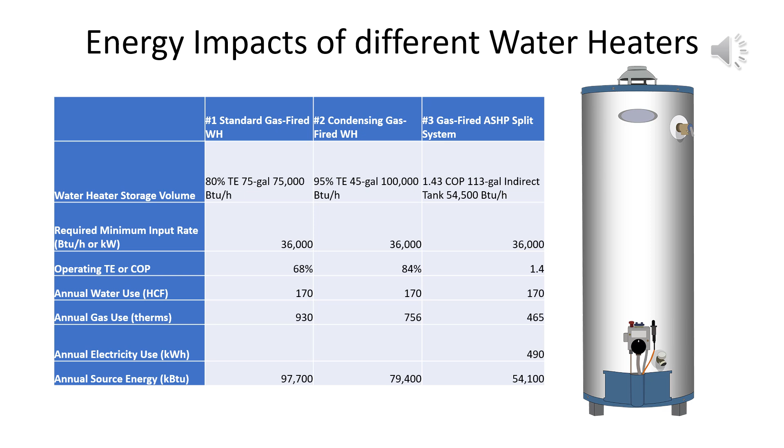The third water heater is a gas-fired heat pump with a standard backup tank-type water heater. It has an effective operating COP of 1.4. This system uses both gas and electricity. To calculate the annual source energy, the electricity use was converted from kWh to kBTUs, and this example clocked in around 54,000 kBTUs per year.

The next water heaters considered were an electric resistance water heater and a hybrid heat pump with electric backup heat. The electric resistance water heater had the highest annual source energy of any water heater considered after correcting for grid transmission losses. The heat pump used just over a quarter of the energy used by the electric resistance heater.

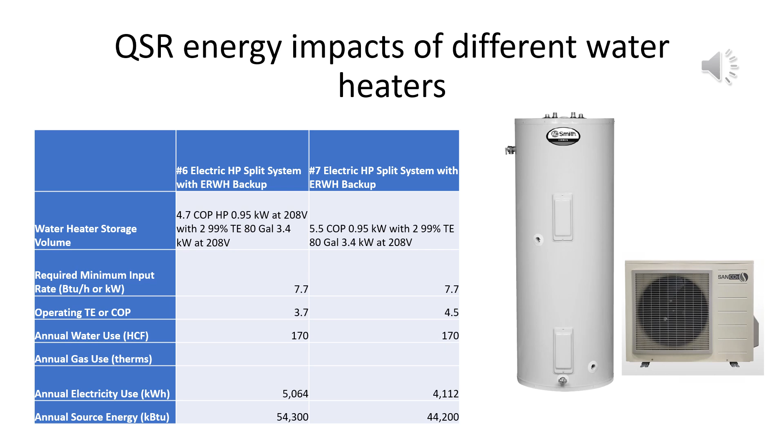The last water heaters considered were electric heat pump split systems with electric resistance backups. The first is a heat pump with a low GWP refrigerant with a COP of 4.7, and the second is a heat pump with a CO2 refrigerant and a more efficient compressor with a COP of 5.5. The effective COPs are 3.7 and 4.5 respectively, which account for short cycling, the use of electric resistance backup, and system losses. These water heaters have the smallest annual source energy of any water heater considered in this design example.

This table considers the cost impacts of these different water heaters on the quick service restaurant. It shows the first year energy cost, the first year water cost, the total installed cost, the 1-year cost, payback period, 10-year cost, and percentage increase in 10-year cost of each type of water heater.

Unsurprisingly, the condensing gas-fired water heater had the lowest 10-year cost of any water heater considered. However, the electric heat pump split systems only added between 4.7 and 11.5% to the total 10-year cost on top of the standard gas-fired water heater.

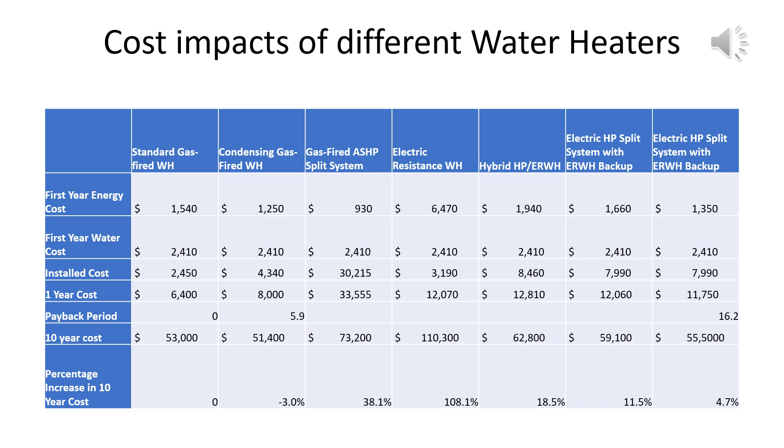For the full-service restaurant, there were many design constraints that could have been considered. For this design example, the full-service restaurant has a pre-rinse spray valve in a dedicated dish room, uses a door-type dish machine in that dedicated dish room, and has a separate bar area and multiple utility and compartment sinks found throughout the restaurant.

In this design example, we will consider impacts of more efficient fixtures as well as the impacts of different water heating mechanisms for the design. Lastly, it will consider different distribution strategies such as continuous recirculation and distributed generation, and see the energy impacts of that on the overall system energy usage and cost.

For the full-service restaurant, the throughput was taken to be constant. This full-service restaurant washes 250 racks of dishes per day. For fixtures, the impact of the dish machine and pre-rinse spray valve were considered.

A standard efficiency high-temperature dish machine was compared to a heat recovery door-type dish machine with cold feed only. A pre-rinse spray valve at 1.2 GPM was compared to a 0.7 GPM model.

For the distribution system, continuous recirculation was compared to a recirculation system controlled by an electronically commutated motor in constant temperature mode. This was compared to a distributed generation system where the front-of-house bar was fed with an electric point-of-use water heater and the main recirculation loop was controlled with an ECM.

This next section will consider the impact of different gas water heaters on the full-service restaurant.

The first system considered is the business-as-usual case. It uses a 70% thermal efficiency storage water heater set at 145 degrees Fahrenheit. This is done so that it can deliver 140 degrees Fahrenheit to the high temperature door type dish machine after all of the distribution system losses.

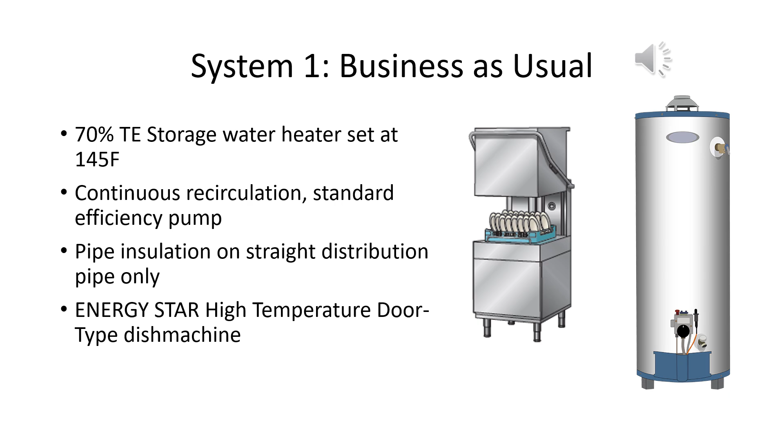This system uses continuous recirculation with a standard efficiency pump. It has pipe insulation on straight distribution pipe only, and it uses an Energy Star rated high temperature door type dish machine without heat recovery.

The second system has many of the same fixtures as the first system. However, there are some fixture improvements. The second system has a digital master mixing valve, an upgraded high efficiency pre-rinse spray valve, an ECM pump, additional pipe insulation, and reduced distribution supply temp to 142 degrees Fahrenheit.

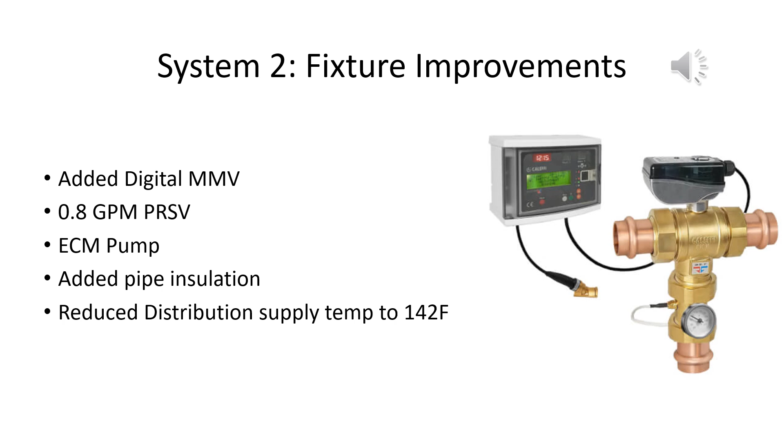This was done because the added pipe insulation and the ECM pump managed to reduce the overall distribution system losses.

System 3 is the addition of a heat recovery dish machine with cold feed only. It drops the operating temperature of the hot water system to 122 degrees Fahrenheit, and it improves the efficiency of the water heater to 90% because it helps to preserve tank stratification.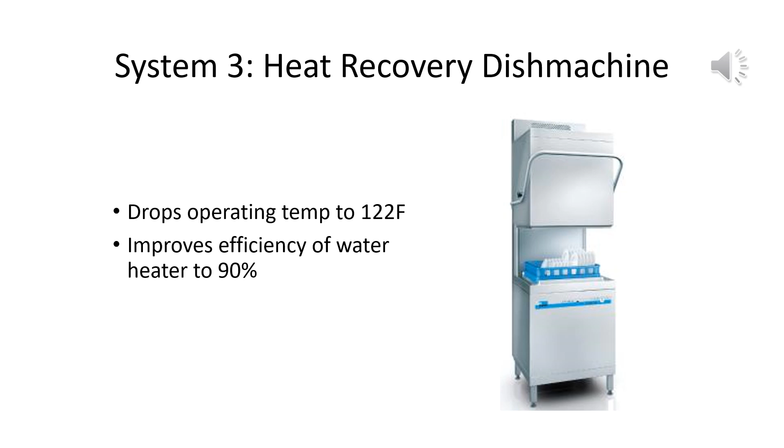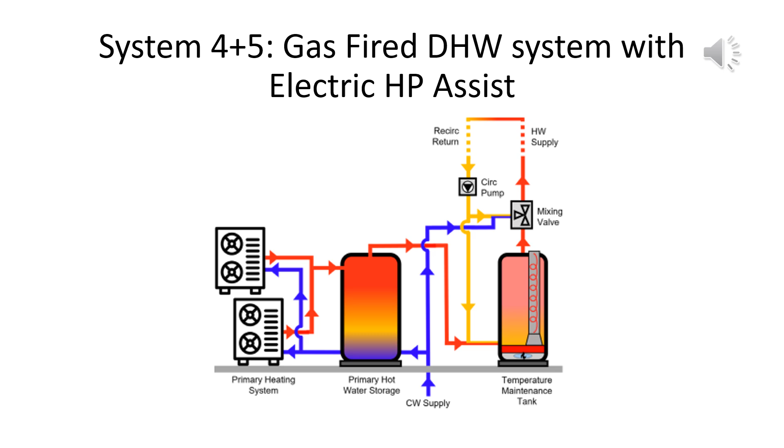Systems 4 and 5 used the most efficient combination of fixtures, but fed them with a gas-fired domestic hot water system with an electric heat pump assist.

The first three systems used different combinations of fixtures and therefore had different water usages. In the first system, the least efficient dish machine and least efficient pre-rinse spray valve were used, leading to the highest total amount of hot water usage at 847 gallons per day.

The second system uses the upgraded pre-rinse spray valve, which dropped the pre-rinse spray valve water usage from 108 gallons per day to 72 gallons per day.

The third system used the high-efficiency dish machine with heat recovery, which dropped the dish machine's water usage from 339 gallons per day to 176 gallons per day, and the total hot water usage from 811 gallons per day to 472 gallons per day. Systems number 3, 4, and 5 used the same combination of fixtures and therefore had the same hot water usage per day.

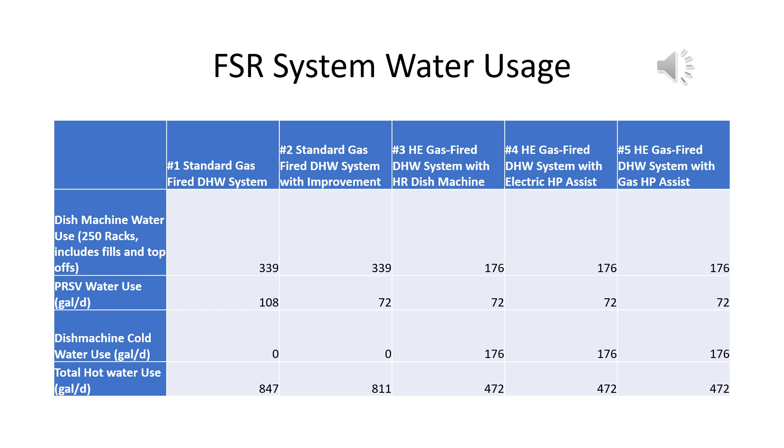This table compares the energy usage of the full-service restaurant hot water systems. The recirculation pipe heat loss was lowest in the third, fourth, and fifth systems because they had the best controlled recirculation system and the lowest distribution system operating temperature.

The third through fifth systems also had the lowest hot water load because they used the heat recovery dish machine. The heat recovery dish machine was responsible for significant energy savings both at the water heater and on the distribution system. The heat pump systems had the lowest gas usage, between only 3 and 5 therms per day.

The total electricity use row includes the electricity use of the dish machine. The electricity use of the standard dish machine was almost the same as the electricity use of the heat recovery machine. The fourth system had the lowest annual source energy of any of these systems.

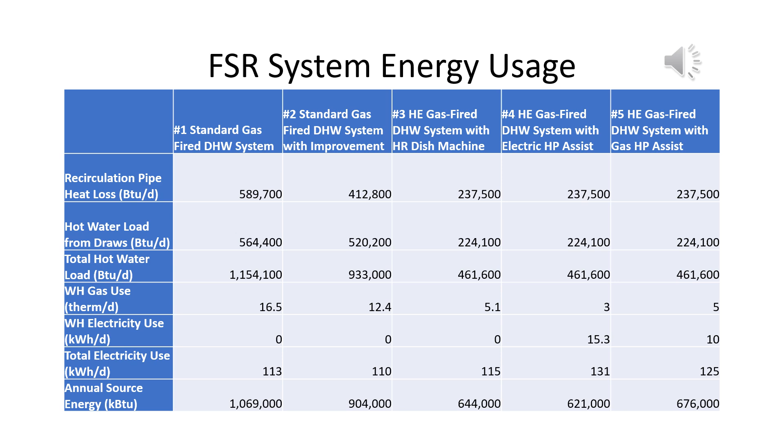The most cost-effective system was system number 3 with the addition of the heat recovery dish machine. However, system number 4 relied much more on electric energy and only used about $8,000 more than system number 3. This shows that it is economically feasible to decarbonize similarly sized full-service restaurants.

Additionally, if electric rates were to stop increasing faster than gas rates, the 10-year total costs of these systems could be different, leading to a faster payback and more attractive total system cost for the decarbonized system.

This next section will consider the impact of different electric water heaters on the full-service restaurant.

For the next set of design examples, the most efficient fixtures and distribution system were used, and only the water heater was changed. Each of the systems had a heat recovery dish machine, a low-flow pre-rinse spray valve, and a distribution system controlled by an ECM in constant temperature mode operating at 122 degrees Fahrenheit.

Both the hot water load and the energy load were the same for all of the systems. The first water heater considered was a packaged hybrid heat pump and electric resistance water heater. To meet the load, three 120-gallon units are needed in parallel.

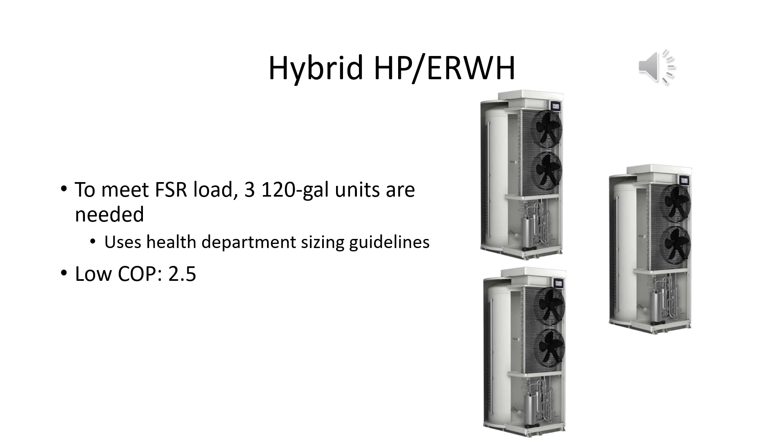This design example used the Health Department sizing guidelines. An effective COP of 2.5 was used.

The most efficient water heater used in this design example was a single-pass heat pump with an electric swing tank. The conventional Health Department sizing was compared against an engineered sizing.

The conventional Health Department sizing used a swing tank design with 4 small split single-pass heat pumps placed in the exterior and connected to 2 119-gallon storage tanks and a 30-kilowatt, 112-gallon electric resistance water heater. The heat pumps were modeled to meet all the hot water draw loads and 50% of the recirculation reheat load.

The engineered sizing used a design based on the hot water output of the heat pumps. It used 6 small split heat pumps connected to 2 storage tanks and a much smaller 3.4 kilowatt electric resistance backup water heater.

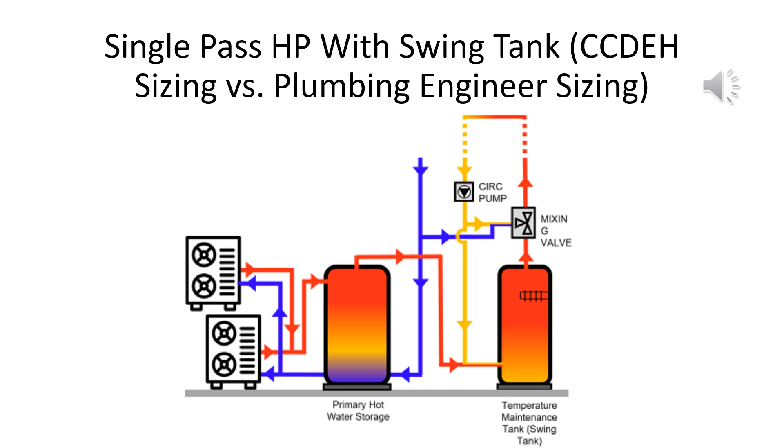This table compares the operating and installed costs of the heat pump water heater systems. The payback periods are compared to the conventional gas-fired water heater. These payback periods are somewhat higher than the payback periods for the gas-fed systems, making them less attractive in general.

The lowest payback time for the gas systems was 1.1 years, and the lowest 10-year total cost was $315,000.

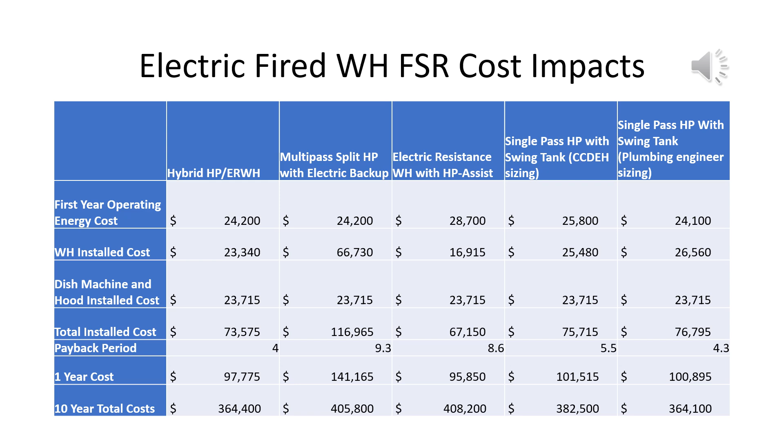This table shows that the single-pass heat pump with the plumbing engineer sizing and the hybrid heat pump and electric resistance systems are both reasonably economically viable, but electricity costs would need to come down before they would be competitive with the lowest gas system.

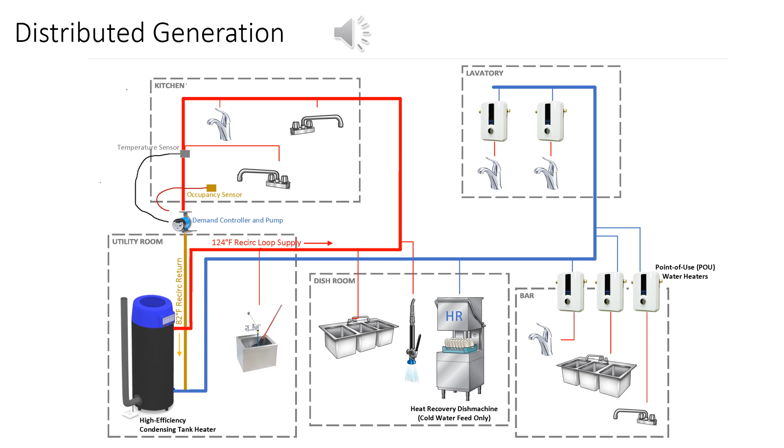Our final design example considers the impact of distributed generation on the cost of each system. It ultimately uses a small controlled recirculation loop and remotes out many of the hot water loads with small point-of-use electric resistance heaters. This design reduces recirculation losses and can help to preserve the operating COP of the water heater.

The heat pump water heater example uses 2 5.5 COP electric heat pumps, a 119-gallon storage tank, a backup electric resistance water heater at 18 kilowatts, and 10 point-of-use heaters at the lavatory sinks and at the bar.

The heat pump has a recirculation loop controlled with a demand recirculation controller and has an operating COP of 4.3. It uses an annual source energy of 583,000 kBTU.

Overall, the heat pump system is fairly competitive with the high-efficiency gas system, only using about $600 more in utility costs per year. Even with the increased cost of the equipment, this shows that with clever system engineering and proper sizing, heat pump water heaters are a viable technology for the commercial food service industry.

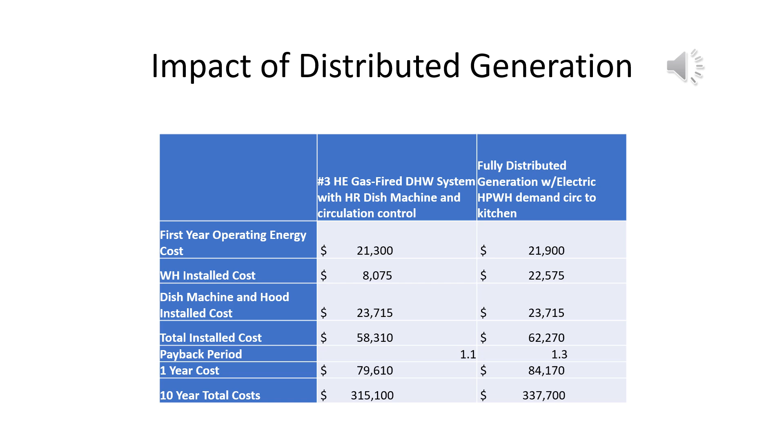This table shows the best paybacks from the full-service restaurant design example. The best simple payback time and the lowest 10-year total cost was the gas-fired DHW system with recirculation control, a heat recovery dish machine, and a condensing water heater.

For the all-electric water heating systems, the fully distributed generation heat pump water heater system boasted a 1.3-year payback and a comparable 10-year total cost to the condensing system. The single-pass centralized system also had a 4.3-year payback over a conventional system.

All 3 of the best payback systems relied on a heat recovery dish machine and high-efficiency fixtures for a better designed system with lower hot water demand of the water heater. Heat recovery dish machines effectively opened the door for heat pump water heaters to be cost-effective, and as California decarbonizes, heat recovery dish machines and heat pump water heaters need to be installed at more restaurants.

Some cost savings will be left on the table, but there will still be significant savings on the order of $10,000 per year over the conventional systems. Electric resistance water heaters are simply not efficient enough to offset the higher fuel costs, but these design examples show that with system design best practices and heat pump water heaters, savings can be achieved through decarbonization.

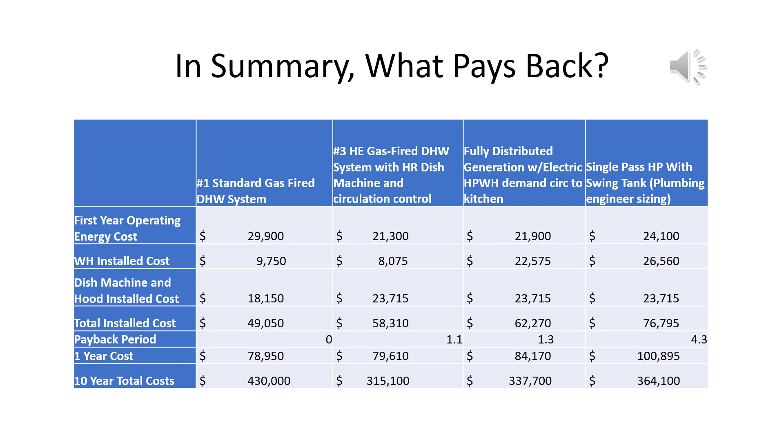Key takeaways. Fixtures. The easiest way to achieve an energy-efficient hot water system in a commercial food service facility is to start by specifying efficient fixtures and equipment. The designer should design a hot water system by specifying the equipment first, then specifying the distribution system, and then finally working back to the water heater.

This will allow the designer to have an accurate idea of the hot water demand and the energy usage that the hot water system is going to require, which will allow them to accurately size the water heater. This will allow the water heater to operate at its optimum efficiency most of the time.

Some best practices for specifying fixtures are to specify high-performance pre-rinse spray valves rated at below 0.8 GPM, to specify ultra-low flow aerators on hand sinks at 0.5 GPM or below, and to select a commercial grade point of use heater at hand sinks if possible.

Finally, the designer should specify an ENERGY STAR certified or better dish machine with heat recovery and only cold water supply connections. These last two steps are of critical importance because they will dramatically reduce the hot water demand seen by the water heater in the mechanical room. Especially specifying a heat recovery dish machine can reduce the overall facility hot water demand that the water heater sees by up to 50%.

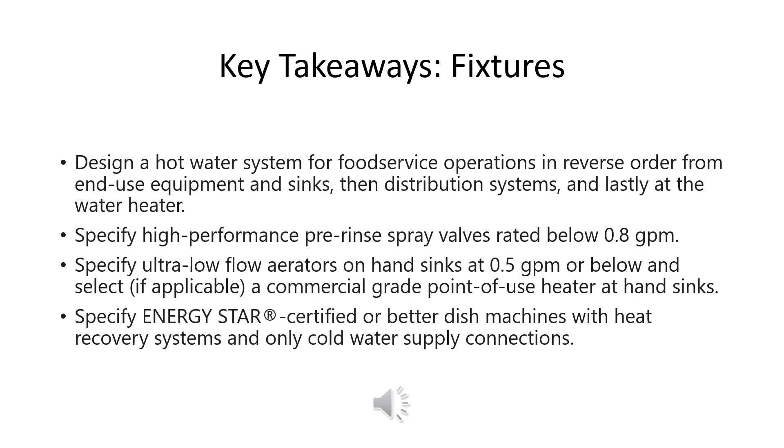Key takeaways: distribution and water heaters. Position the water heater as close to the dish room and other sanitation sinks as possible. This will reduce the total amount of hot water piping and reduce heat loss through the distribution system.

If specifying a gas-fired water heater, specify a high-efficiency condensing water heater with or without heat pump assist. This will allow the water heater to operate at a higher efficiency than if specifying a conventional efficiency water heater.

If specifying an electric water heater, specify a hybrid heat pump / electric resistance storage water heater or a single pass split heat pump storage tank primary water heater with an upper element.

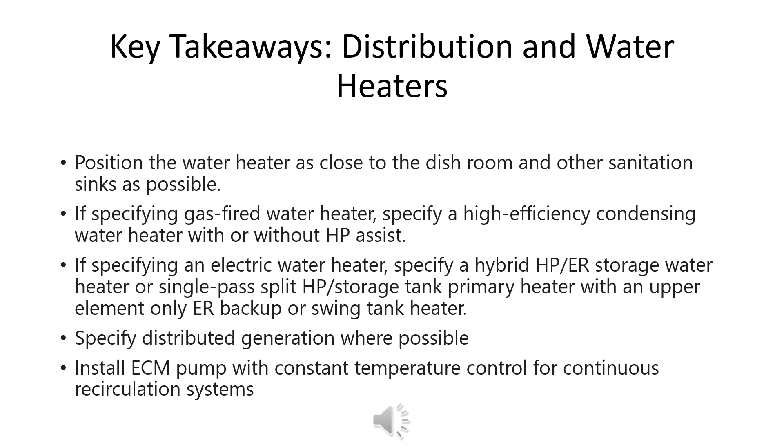Specify distributed generation where possible, because this will further reduce pipe heat loss. Finally, install electronically commutated motor pumps with constant temperature control for continuous recirculation systems. This will further reduce the amount of recirculation and pipe heat losses through the system and increase the overall energy efficiency of the system.